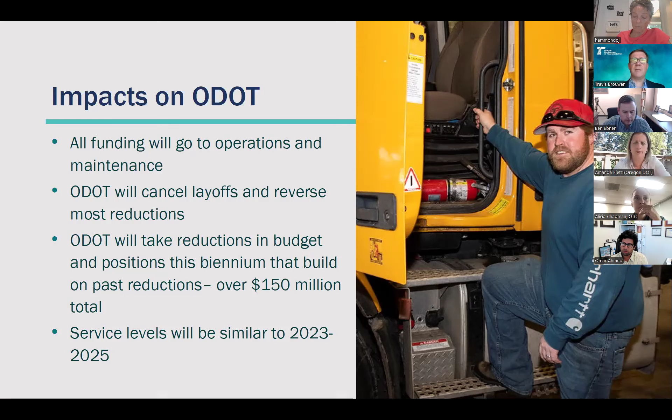all that money essentially has gone into construction and not into maintenance. So if passed, this would allow ODOT to cancel layoffs and reverse most of the reductions, although it does layer in some reductions. We've already taken reductions for the last couple of biennia, and this would add some on top of that - it's not as if we're coming out of this fat and happy. We were actually reducing our budget by over $150 million this biennium compared to what it otherwise would be. But this would, if passed, allow us to have service levels fairly similar in our maintenance area to the 23-25 biennium, before we got into this period of deep reductions.

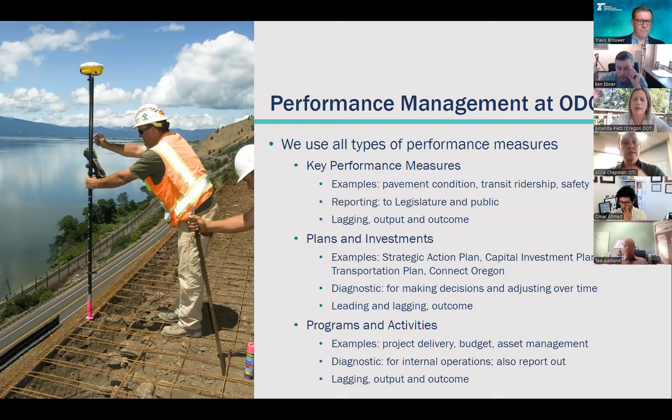Thanks, Amanda. Next slide, please. So key performance measures are sort of a unique beast, and the process by which they're created provides both some benefits as well as some limitations. The key performance measures are a limited set of measures, and as Amanda noted, they're more sort of the lagging output or outcome measures that the legislature has asked us to report on.

So you'll oftentimes see that they are of topics that are very high level. Sometimes they are areas that ODOT has a lot of ability to help influence the outcome, sometimes not nearly as much. And I know that's been a topic of conversation in past years around this table.

What we're required to do with these measures is have them reviewed by the CIAC and then report to the OTC on our progress and outcomes. Those reports are shared with the Legislative Fiscal Office and the Department of Administrative Services. It's a very prescriptive process where we share thoughts and ideas about what our key performance measures should be, but it's ultimately the legislature who sets both the measure and the target. There have been times we've said we think we should create, modify, or get rid of a measure, and the legislature says nope. So they really ultimately own these measures.

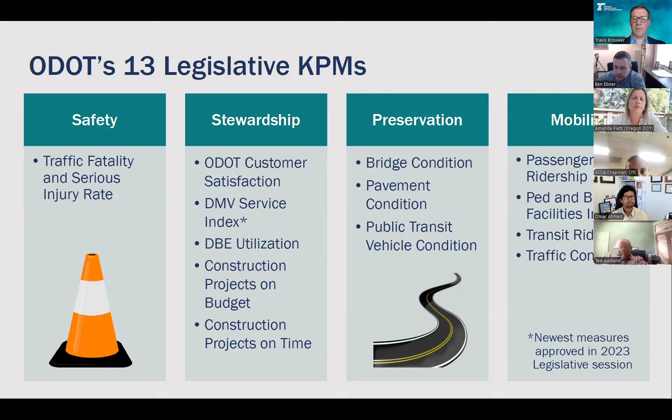Not all of these are ones we can readily influence in quite the same way. Bridge and pavement condition we may arguably have quite a bit of control over. Transit rides, when that's really a function of dozens of local transit providers across the state, is probably an area we have much less influence over. Next slide, please.

We take all these 13 performance measures, and each year we look at how we're doing on them—are we on target or off target? Again, sometimes the target may be a little aspirational, so just because we're off target doesn't necessarily mean we're doing badly; we just may not be doing as well as we or the legislature would want. We also look at whether we are steady, improving, or worsening. Today we're going to focus on those in the lower right quadrant, the ones where we're off target and worsening.

Bridge condition, construction projects on time, fatal and serious injuries rate, and DBE utilization. We'll also talk a bit about construction projects on budget, because on time and on budget really come together in a similar way, and they're very relevant to the work of this committee going forward. We're happy to answer questions on the other measures as well—I think we have folks who can probably answer those across any of the different performance measures. So with that, I'll turn it over to Angela to talk about the DBE utilization.

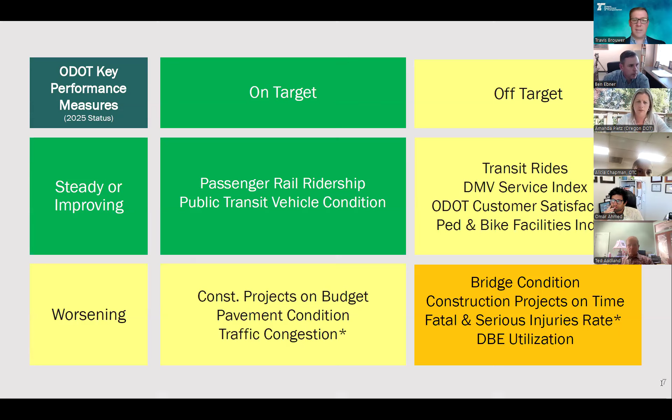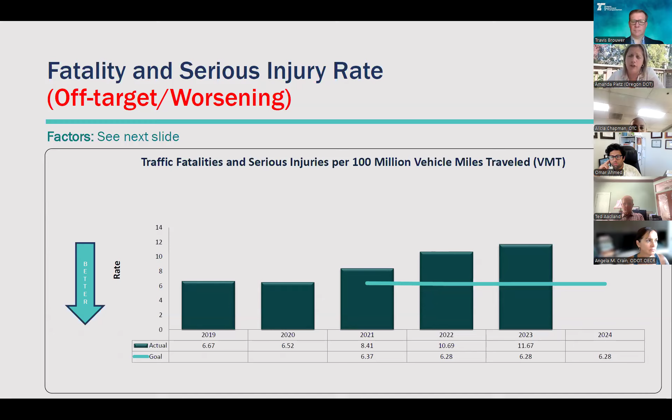As you can see here, we're not moving in the right direction. We're seeing more, especially serious injuries, as I'll talk about here in a moment, and we're still at decades-high fatalities and serious injuries overall. For vehicle miles traveled, I'll just note that vehicle miles traveled have increased slightly in recent years in total. Per capita, they've actually declined about 9% from 1990 levels. But it is trying to really get at the rate of exposure to what we're seeing for fatalities and serious injuries.

On the next slide, you'll see some shots from the State of the System dashboard. This is something that I brought to the Continuous Improvement Advisory Committee. You all gave some great feedback that led to the creation of this, and it being refined over time.

This is where we try to keep updates at least twice a year, ideally quarterly, showing what the trends are on key areas. For safety, this allows us to do more of the diagnostics than the high-level reporting measure from the KPM. Safety is so important, so that's something we drill into deeper to see what's going on.

What we see from the data is that while we're seeing a slight drop in fatalities in 2024 and thus far in 2025, we're actually seeing a pretty steep increase in serious injuries. Serious injuries in many ways are just as important as fatalities—they're life-altering for the people and families impacted. So it's something we want to pay attention to.

Looking across other states, Oregon's actually had a steeper rise than neighboring states and many other states across the U.S. Part of what we're looking into is whether that's an artifact of reporting or data in some manner. What we've found thus far is it doesn't appear to be, or can't be confirmed at this point, but that's still something we're digging into and identifying.

In terms of what we're seeing, impairment continues to be an issue—not just impairment from alcohol or drug use, but polysubstance use. Multiple impairments affecting driving are going up, and going up pretty substantially.

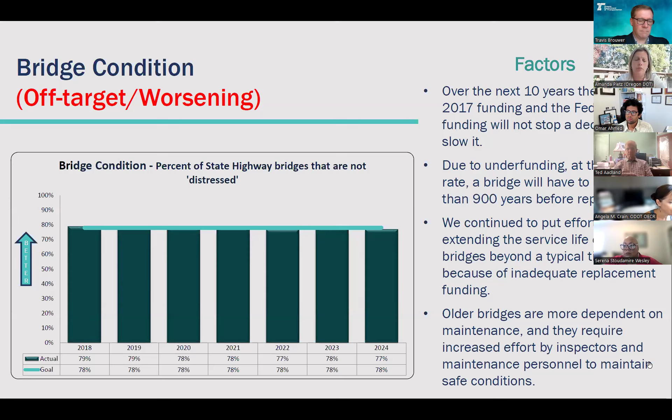What we're seeing is that this has been really influenced by the delivery of our ADA curb ramp program, and delays in ADA curb ramp project completion as we've worked through refining how we're delivering those projects. I think one challenge we've seen across the ADA curb ramp projects is the timing of when right-of-way acquisition and utility relocations are resolved relative to construction.

We've definitely seen construction completion delays as right-of-way acquisition is delayed, or utility relocations are delayed. One of the things we've aimed to do with the ADA delivery program is initiate construction before, and do construction phases knowing that right-of-way acquisition is underway. That's something we've worked through with Federal Highway process-wise, but that's resulted in some contracts missing their original construction completion dates and being pushed out.

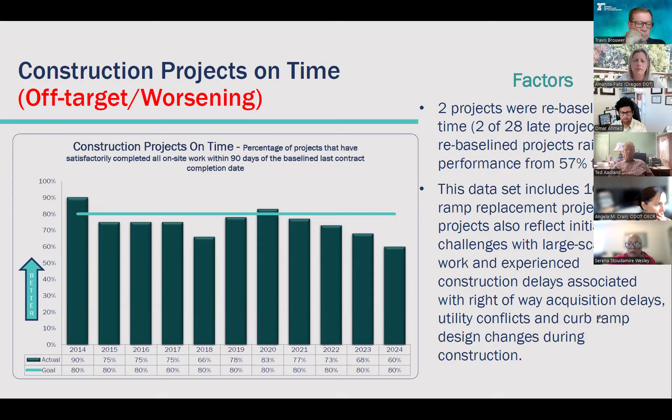All right, we can look at that set of data as well. Thank you, Commissioner.

All right, and then construction projects on budget. Right now, we are meeting our target here, but we have seen some reduction over time.

I think we've seen material price escalation play out during construction, and that has led to some cost overruns. Of course, there are also change orders that can contribute to this, and as this notes, that could be changes in conditions, environmental issues that come up during construction, such as contaminated materials encountered during construction.

For example, one of the things we are trying to do to manage this in the longer term is address how we set our construction authorization in the first place, trying to ensure that our original construction authorization accounts for uncertainties that we know will play out during construction, and ensuring we're planning for that financially when we begin a project, so we're not in the position of needing to add funds and budget to address those risks. So we're looking at what we can do to set our construction authorizations more thoughtfully with regard to construction phase risks.

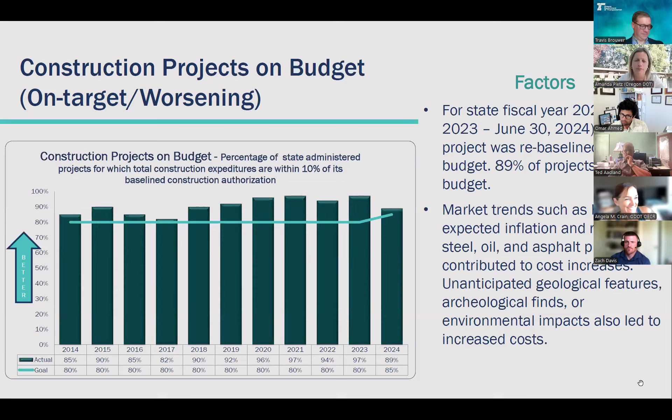Okay, well, I trust this is the last slide. So if there are no other questions, then let's please move on to the next agenda item, major projects updates. I think, Omar, you can go ahead and share your screen.

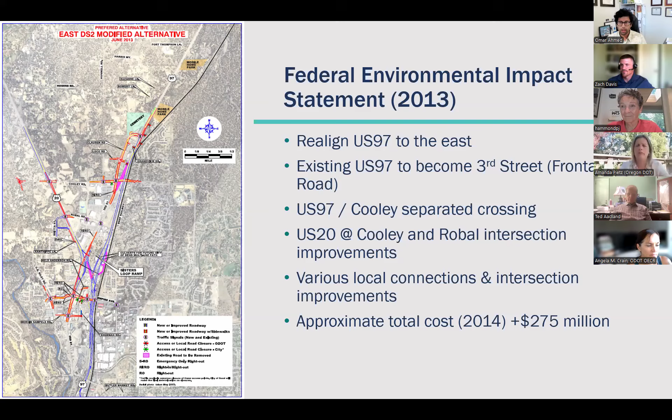We knew that we would never see that amount of investment in Central Oregon, so we started to distill out what we needed to do and what would be feasible. One of the things we looked at first was pulling out the goals of this work. What's the purpose of this project? What are the goals we're trying to achieve?

First and foremost was mobility during and through and after construction. We wanted to reduce congestion on US 97 and US 20. Another way to put that is to increase travel time reliability. We didn't want to have zero congestion, we just wanted it to be predictable. So if you're driving a truck from California to Washington State, or if you were simply commuting to work, you knew that you could rely on a certain period of time to get through town.

We also wanted to focus on increased access for all modes. This is a very car-centric area, but as Bend started to expand, there's a lot of adjacent neighborhoods and schools. So we wanted to make sure that folks could pick their mode of travel through and to the project area. We wanted to also increase safety.

The intersection of Cooley and US 97 was a pretty high crash incident site. If you're familiar with the 97, it's 65 miles an hour north of town. It would start to neck down to 55, 45, and before you know it, you'd be at stop traffic at the Cooley signal, which led to a lot of rear end collisions.

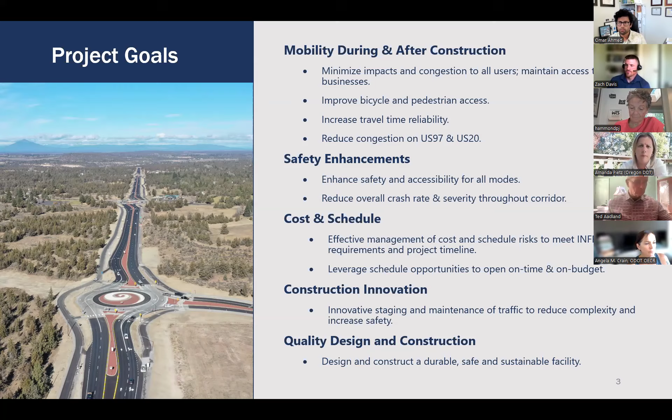So this is where we ended up landing after trying to refine our scope quite a bit. What you're seeing here, north is up, and you're seeing kind of the V where US 97 and US 20 meet on the north end of Bend. Starting on the US 20 segment, Cooley Road was stop controlled and was a big high incident safety intersection.

So we planned on constructing a roundabout there on US 20. Robal Lane was a traffic signal that was operationally failing, and so rather than improving a signal, we constructed a roundabout again for operation and safety needs. If you're familiar with the area, this is where our Costco moved as well, inducing quite a bit of traffic to this part of town.

There was an original plan as well for the Deschutes County Public Library to have their new site here just to the west. That ended up changing later, but we still planned around it. So generally improvements on two roundabouts, and then about 1.5 miles of separated 12-foot multi-use path as well.

The red line that you see, that's business 97, or what was old 97. So we converted that to a business route, did a little bit of a road diet there, and provided space again for about a mile of separated multi-use path and a bunch of ADA corrective work.

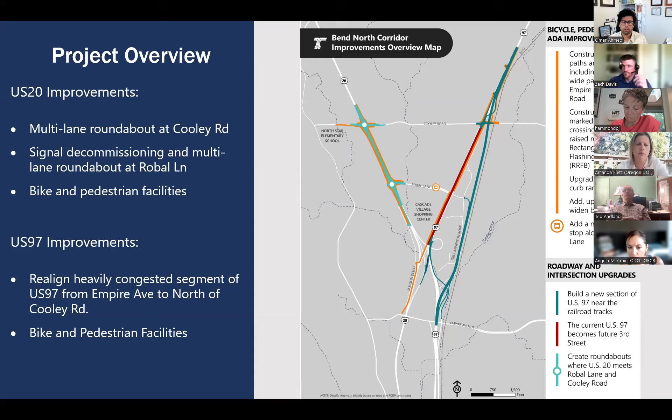So starting in 2017, we had started refined scope. We had House Bill 2017 provide $50 million of funding through what was named a project called the Cooley Midterm Improvements. That scope focused solely on US 97 and Cooley Road, just that intersection.

ODOT then applied for an INFRA grant in 2017. We did not receive that grant, but we got feedback on what to do better next time. In 2019, we again applied for the INFRA grant and were awarded $60.4 million towards the larger project. With that in hand, we started concept progression in earnest, creation of a contract for design build procurement, which Zach will spend some time talking about here in a bit.

We started right of way, and then we started procurement on that contract. In 22, we selected Kiewit Infrastructure as the best value proposer. Their lead designer was Jacobs. Notice to proceed was issued in June of 22. In July of 23, all of our major design packages were complete.

October of 23, US 20 was completed early. Zach will talk about that. And then Christmas Eve of 2024 was our full contract completion date, and we completed the 97 corridor side early as well.

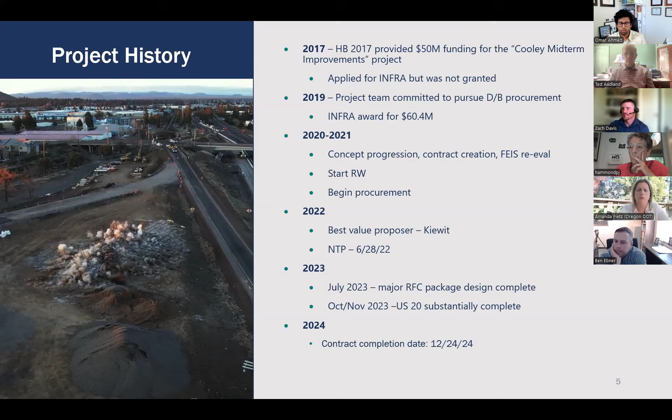So here's a quick breakdown of funding. There's more detail on construction authorization proper in the memo. But just to give you a quick breakdown, about $2.5 million for preliminary engineering. Most of the design on this project was handled under the construction phase due to the design build nature. A large amount was spent on right-of-way for a new highway alignment.

We started purchasing right-of-way in 2020, which ended up becoming a peak of, or the start of a peak of, real estate in Central Oregon, given folks moving here. But we didn't know that at the time. And then $117 million of construction authorization. About $102 million of that was the contractor's bid amount.

Other included anticipated items. We had some right-of-way contingency that we put in other, given the design build nature. We also had a quiet crossing, so BNSF coordination, I'll say, and that included budget to purchase new signal equipment for BNSF.

Does that answer that? Okay.

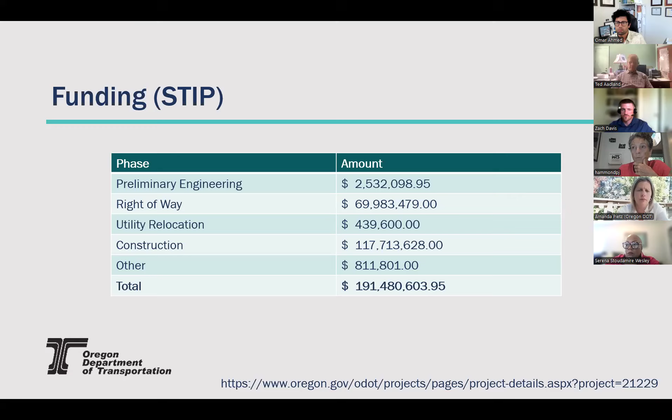Just to give an idea of how hard we had our foot down on this thing: we had design build as a contract mechanism approved in February of '21. By April, we had let contractors know this would be the method we'd be pursuing. It was a two-phase procurement with a request for qualifications first, shortlisting, then a request for proposals. We did the RFQ in June of '21, the RFP in September, received technical proposals that winter and price proposals in March. We awarded in March of '22, and they had notice to proceed by June.

So with that, I'll hand it over to Zach, and he'll tell us why we picked design build. So why did Region 4 choose design build for the Bend North Corridor project, and how did it deliver for Oregonians?

At the heart of design build's benefits is its seamless integration of team-driven proactive risk management, which drives projects to meet critical cost and time objectives. Unlike traditional design-bid-build, where the design phase lacks the contractor's perspective on project risk, design build brings all stakeholders together early to identify, assess, and manage opportunity and threat risks holistically. This unified approach—owner, designer, and builder—enables teams to anticipate fully informed risks such as site constraints, regulatory hurdles, or material availability, and develop creative solutions before they escalate, preventing costly delays and budget overruns.

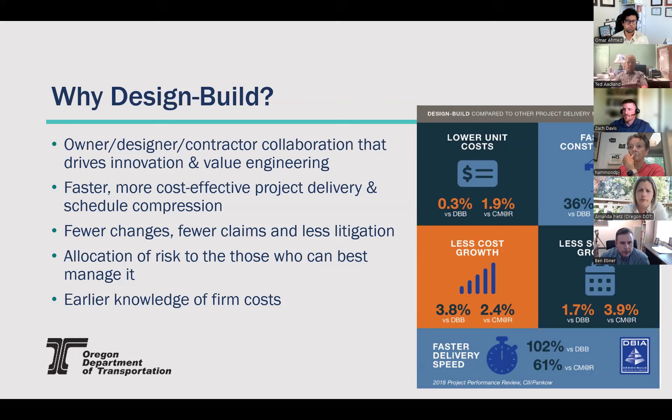Beyond its strengths in risk management and innovation, design build delivers faster project completion, a critical advantage of the delivery model. Unlike traditional design-bid-build, where design and construction phases proceed linearly, design build allows these phases to overlap, optimizing the critical path schedule. According to DBIA, the Design Build Institute of America research, design-build projects are delivered 102% faster than design-bid-build from design through completion, allowing the public to receive the benefits of these projects sooner.

This schedule compression translates into significant cost savings. For Bend North Corridor, a $114 million project for design and construction—that's our final estimate—reducing the delivery schedule by one year through design build saved at least $3 million in inflation costs alone. Moreover, design build's lump sum contract structure incentivizes contractors to complete projects early, reducing overhead and equipment costs, which range from $1 to $2 million per month for the contractor and $250,000 a month for the ODOT admin team. While the contractor retains those overhead savings within their organization, as they should, every month delivered early saved the public $250,000 in ODOT overhead alone.

So the money value of time is a primary reason why ODOT and the contractor collectively deployed an attack-the-schedule mentality to delivering the project. To illustrate that, the original Bend North Corridor design build schedule, published post-award in early 2022, projected completion timelines for US 20, new US 97, and the existing US 97 corridor. In the as-constructed condition, the design build approach enabled all three of these segments to be delivered a month and a half ahead of schedule, showcasing the method's ability to exceed expectations.

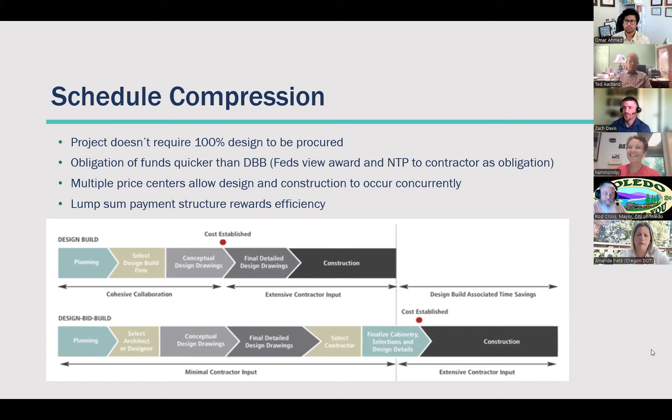The construction sequence leveraged the design build method's flexibility to manage this complexity. Initially, the majority of construction resources were allocated to US 20, including the Cooley and Robal roundabouts, while the new US 97 alignment remained in the design phase. As US 20 elements were completed and brought online, resources were seamlessly shifted to the new US 97 alignment. This phased approach continued, with resources then transitioning to complete the existing US 97 work.

This strategic resource allocation, enabled by overlapping design and construction phases across these 8 design packages, allowed all 3 of these corridors to be delivered a month and a half ahead of schedule. The design build method's ability to initiate US 20 construction while new and existing US 97 were still being designed was critical to successfully coordinating and efficiently delivering this multi-package project.

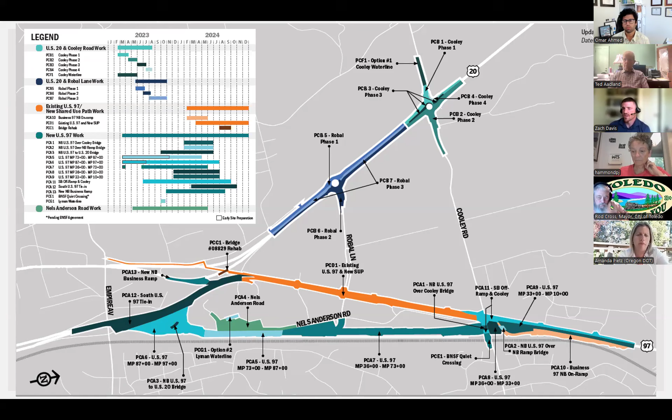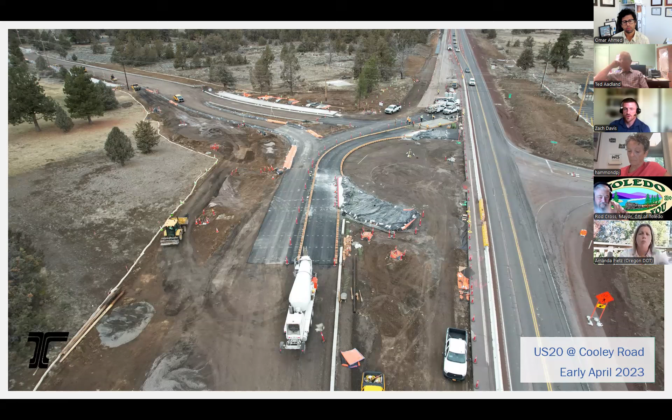Next slide. To put the pace of progress into perspective, this is the US 20 and Cooley Road intersection in April 2023. At this stage, traffic on US 20 was reduced to a single lane in each direction, while construction crews worked within a tightly constrained work zone protected by concrete barriers.

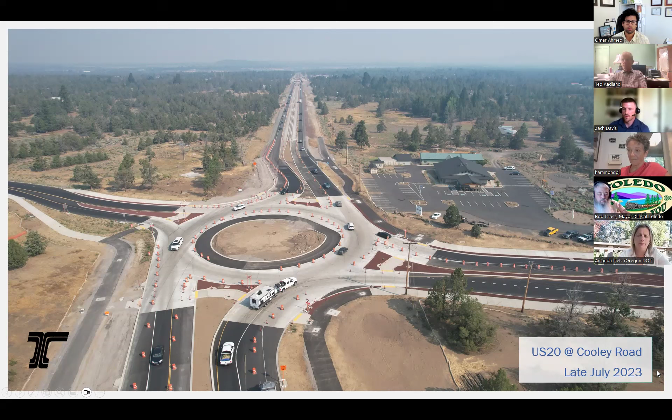Next slide. Just 3 months later, by late July 2023, the US 20 and Cooley Road intersection was operating as a single lane roundabout. By October 2023, 5 months later, the US 20 corridor was functionally complete, with both Cooley and Robal roundabouts operating in their permanent multi-lane configuration. Next slide.

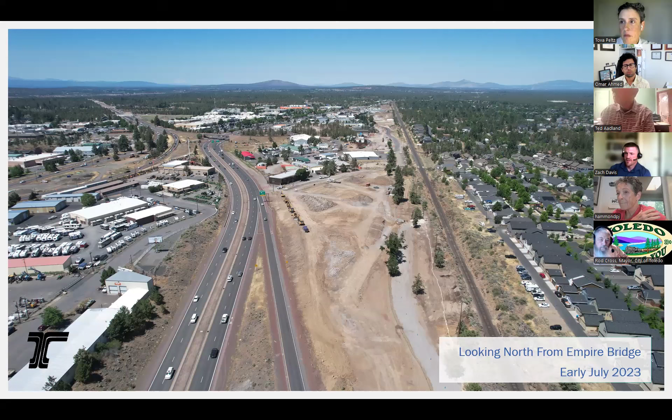Here we're looking north from the Empire Bridge in early July 2023 at what is now the new US 97 alignment. This view highlights the scale of earthwork and grading needed to prepare the corridor for future lanes and structures. On the left, you can see traffic continuing to move through the existing US 97 while construction progressed just a few feet away. This photo captures how the project was advancing simultaneously across multiple fronts, keeping traffic flowing while building out new capacity and safety improvements along the US 97 corridor. Go ahead, Tova.

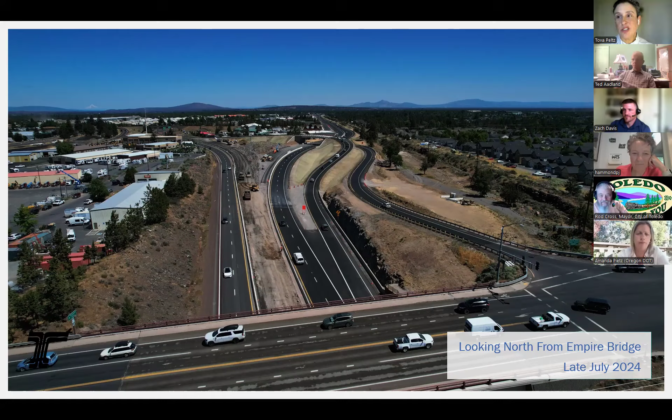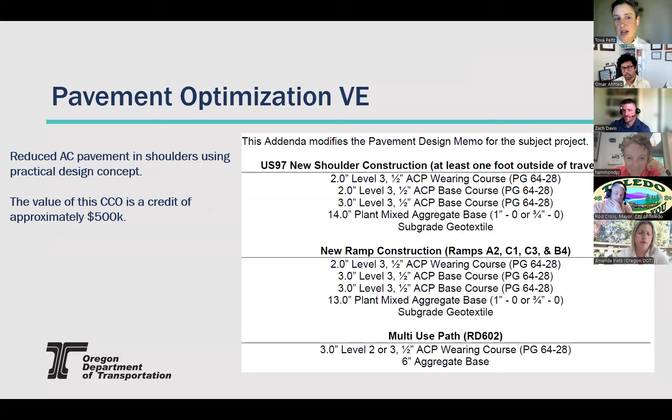I probably want to hear the final cost of the project. Pardon? I want to hear the final cost of this project. So Zach, my suggestion then is maybe Omar, do we want to jump forward here? We don't have the final cost of project as a slide, but we could just speak to it really quickly so you all know the actual impacts of what we're dealing with. So Zach, do you want to start with that? Sorry, the final cost, where we landed, what the authorization was.

Yeah, our authorization for construction is 117 million, and we're sitting at 111 million. There's still some claims that the team's working through, which is what's on the screen right now. So yeah, just to close then, obviously our project team, led by myself and Zach, we kept our foot down from day one on this project to attack the schedule and literally VE everything we possibly could in partnership with the contractor and lead designer. That let us finish the project well under budget. Obviously we have cost risk that continues to exist via our claims. We're in that process now, so we can't talk too much about the details. But we're pretty proud of our accomplishment on this project, getting it done early and under budget.

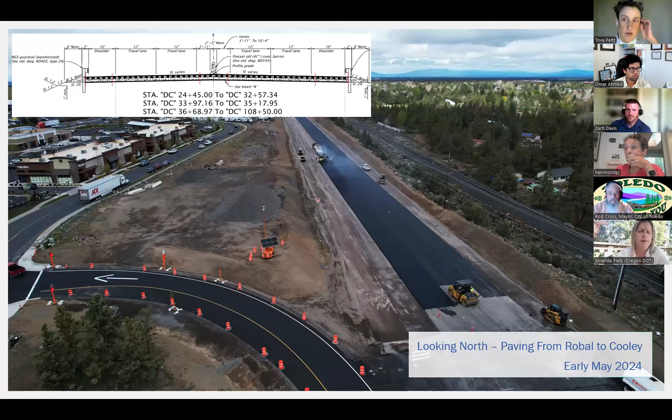I think, Omar, maybe we could flip to slides 18, 19, 20, and share how work was completed early.

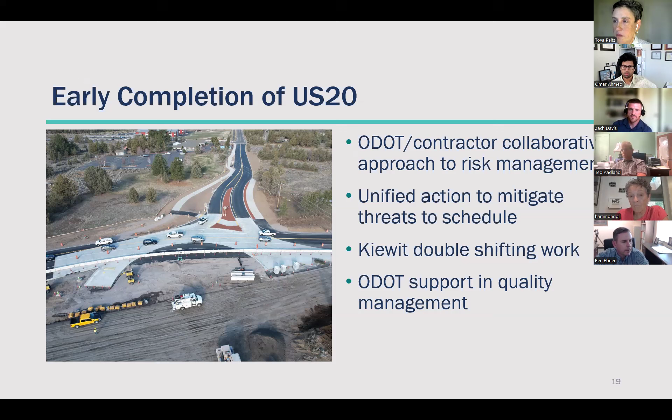We carried the same risk management approach from US 20 into both the new and existing US 97 alignment work. On the new alignment, ODOT faced right-of-way acquisition delays that threatened to impact the schedule. To keep progress moving, the team revised traffic control plans to open new work access areas and negotiated rights of entry on parcels that were not yet fully acquired, allowing construction traffic to move through those choke points and keep earthwork advancing. So even after the design service delays were reduced, downstream impacts still affected the construction schedule critical path.

To mitigate these impacts, ODOT authorized a couple of different measures. We allowed the design builder to close US 97 to drill and blast near the Empire Bridge. We provided relief from some of the design builder's proposal commitments by allowing concurrent disruptions to US 20 and US 97 traffic. And we granted relief on seasonal work limitations for asphalt paving and permanent pavement markings in lower impact areas. So the as-constructed schedule analysis shows that these actions, coupled with the design service delay mitigating actions, avoided a critical path delay of about 188 calendar days and prevented $7.1 million in added costs.

So throughout the project, we worked closely with the design builder to manage costs, schedule, quality, and risk. At the same time, there were a number of disputes that arose, but we've already spoken to those, so I'm not sure if we want to move on to other items here. Or, okay, yeah, I think we're probably good and over time, right?

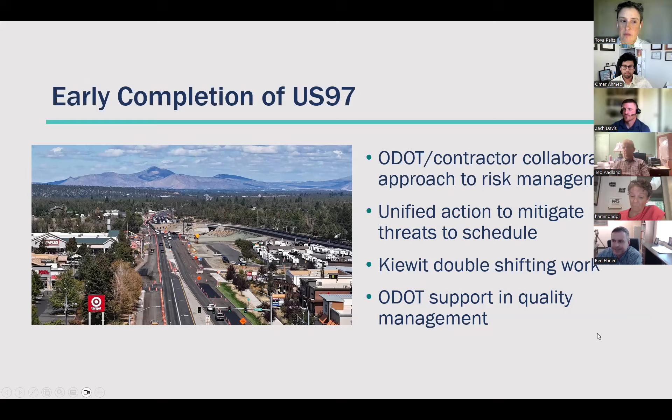Good. That's all we got. All right, very nice. Stand up. No, I was up before. Okay. Go ahead. Zach, any other questions for Zach and Omar?

Zach, really good job on that project and working together with a contractor. That's what makes the difference. It's all about decision making. If you can make the decisions and keep everything moving, you'll beat the budget and you'll beat the time. So that's what it takes. Good job. I appreciate that, but I would be remiss to take all the credit. Of course, it starts with effective leadership, which would be Omar in Region 4. And I've had the privilege of delivering over $250 million in infrastructure to Oregonians, and I could say without hesitation that Omar is one of the strongest and most effective leaders I've ever worked with.

So I'll pay you later, Zach. Thanks. Good job, Omar. All right, thanks again, guys.